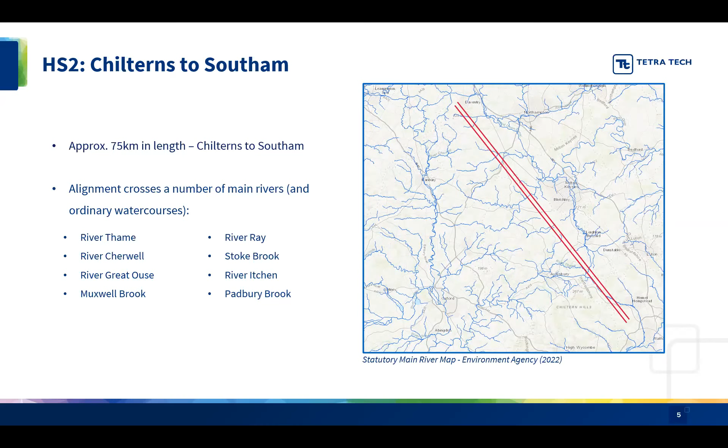So I'll just run you through now the different sorts of packages I'm involved with for consenting on High Speed 2. So probably starting off with the most simple sort of package is for drainage outfall. So this could be a drainage outfall draining from the HS2 track itself, or the embankments and the cuttings associated with the track and discharging into watercourses. Also drainage culverts conveying the same sort of drainage.

Watercourse diversions are a bit more complex. That looks at where we're having to actually divert the watercourse due to the HS2 alignment or structures associated with HS2. Flood compensation areas, we have to consent for them as well. So that provides mitigation for any increased flooding from HS2.

So section 2 is the case study of Viaduct X. So I've been leading on this consent, which comprises an 880 metre long viaduct, which crosses a main river on the HS2 alignment. As it crosses a main river and its pier footings either side of the channel are in proximity of the channel itself, it requires consent from the Environment Agency.

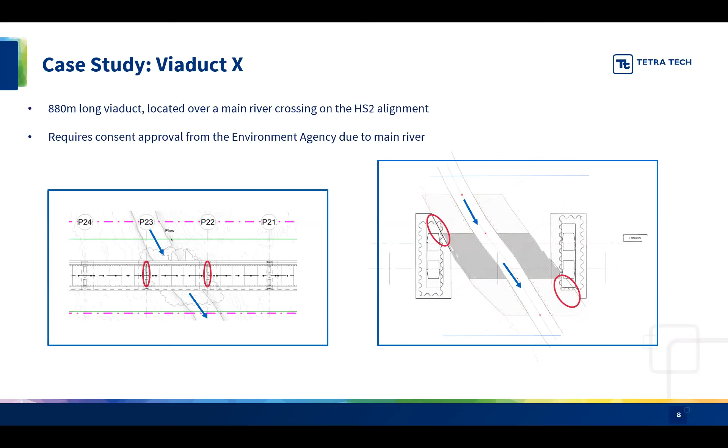And then the angular pier shape of the pier footings also may provide a greater structural benefit, but again, the EA flagged that these piers can actually be more prone to causing scour due to their shape, essentially.

So following this, I used my knowledge of the Water Framework Directive to identify that the scour potential from our current design could actually be detrimental to the WFD status of the water body and also to flood risk in the area. So I reviewed the water body status and I found that the water body was assessed as having a yellow impact as defined by the Water Framework Directive.

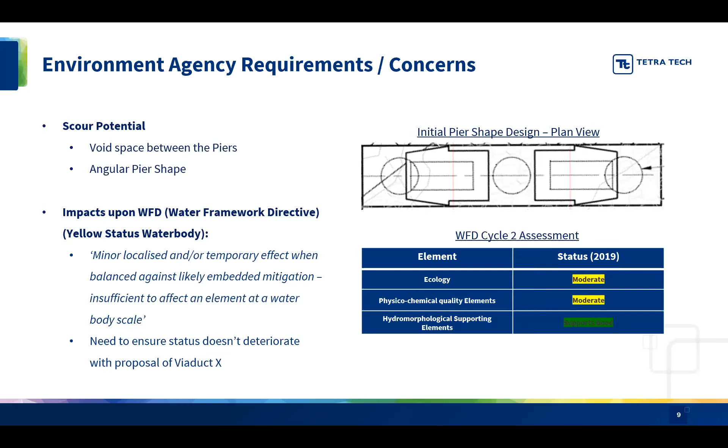And I facilitated these discussions between the design disciplines to essentially satisfy the EA requirements, but also to ensure WFD impacts were negated, and to ensure HS2 tech standards were adhered to as well.

Sorry, my slide's sticking a little bit. Oh. Sorry, it's not wanting to move on. I'll give it a second to load. I think I've frozen. Hello? Am I still in the call? I can't quite see. Oh yes, Josh, we can hear you, but we're on the communication with design teams slide at the minute. Maybe you need to stop sharing it and share it again. Oh, it's moved on now. Okay, there we go. There you go, I just saw that. Sorry, I lost where I was for a second.

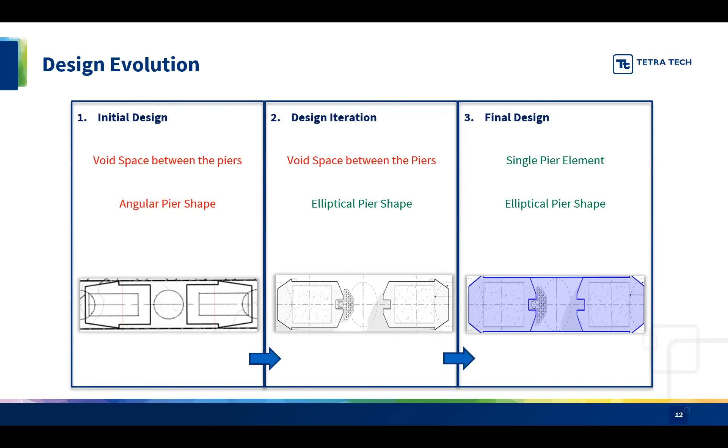Oh, I think it's struggling again, sorry. I've gone through this many times today and this hasn't happened, as it usually happens. Let me try. I'm getting a little frozen circle, sorry. Yeah, we can still hear you, Josh. We're just on the design evolution slide at the minute. Oh no, it's really struggling. I might have to stop sharing. My whole computer's not wanting to open the PowerPoint. I'll close it and reopen it. Apologies. All right, Josh, take your time, and if you're still struggling, we'll come back to yours in a minute. Okay, I think it's working now. I'll share my screen again. Can you see the slide? Resolution and challenges. Yes, that's on there now. Perfect. Sorry about that.

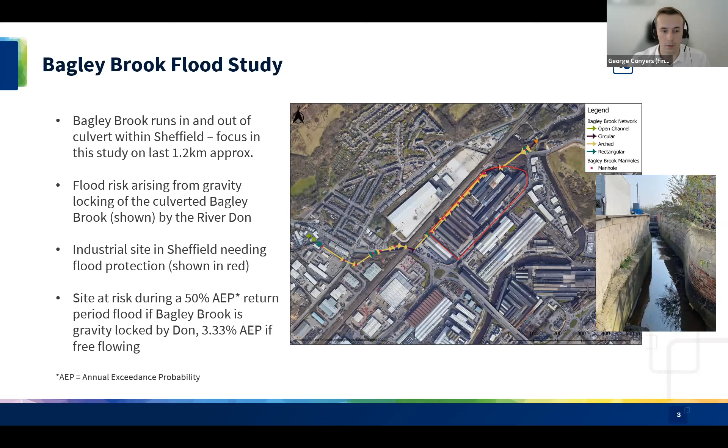So initially, I started on a hydrological assessment, which was carried out using WinFAP 5 and ReFH2. So I used a statistical method in WinFAP and did a GIS assessment of the FEH catchment, and I found that I needed to extend the catchment out to include the last portion. So I increased the size of the catchment.

I then upscaled the ReFH hydrographs that I got from ReFH2 using the derived flows from the statistical method for use in the TUFLOW hydraulic model that I built. I also applied climate change allowances to that. So at the time the allowance for the upper epoch was 40%. So that's what you'll see in some of these slides later on.

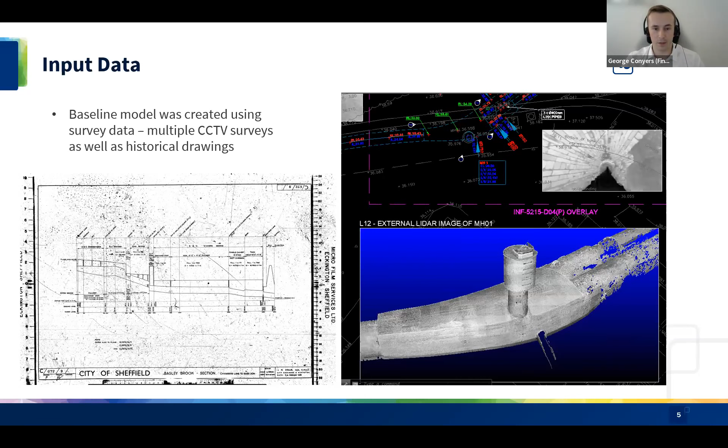So in terms of constructing the model, it was constructed in TUFLOW. I used shapefile layers created in QGIS, which has a standard naming convention. That's then run through a text file, and that's then run through the TUFLOW executable file. So the model I created was a 1D-2D linked model. So it used that survey data from the other slides for the 1D culvert network.

And then for my 2D domain, I used a 1 meter resolution EA LiDAR. And then I applied OS MasterMap to that, which I was able to use for the Manning's roughness to get a good representation of how water would flow over the floodplain.

I inserted the hydrological flows that I derived from my hydrological assessment as weighted point and lateral inflows, and that was based on the catchment area. So I think I applied a point inflow at the top of the model of 88% of my derived flow, and then the rest came in as lateral inflow.

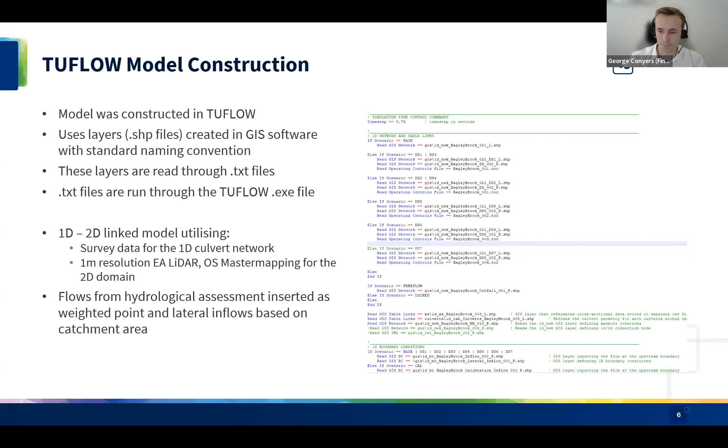In terms of the challenges that I faced when modeling this, to start with, most of that reach was culverted, so 1,150 meters of that 1.2 kilometer stretch of study area was culverted. So we really needed that 2022 data and synthesizing other bits of data that we had to get a good hydrological and hydraulic understanding of the Bagley Brook.

We had some challenges in terms of gaps in the survey data. I couldn't find inverts for all the changes in culvert dimension, which is required by TUFLOW, and I had to then manually interpolate between those points with the inverts that I had. Again, using a 1949 long profile, everything was in feet and inches, so I had to convert that and then find out where those inverts were in relation to the present day manholes.

There's also quite a lot of complex structures within that culvert. For example, one of them was a siphon chamber, which I had to model. And there's no sort of known example of how I would do this. So I had to devise a solution from my own knowledge of hydraulic modeling.

And also a further challenge that I encountered was the fact that you've got a sewer pipe running straight through the middle of the chamber. So it was even more complex to find a solution there. And this is just my model that I created.

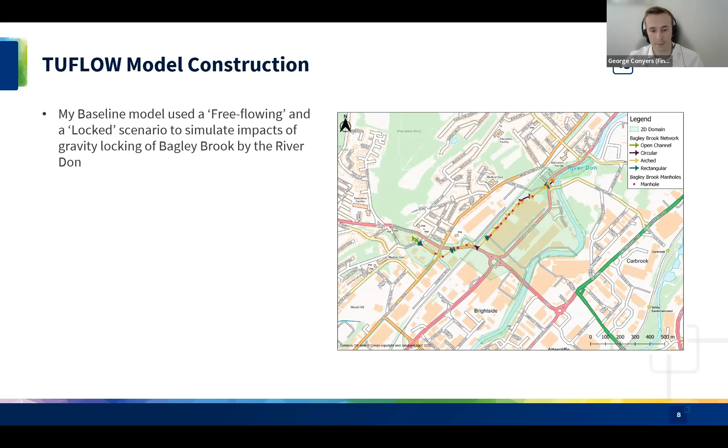So I created 2 baseline scenarios, one free flowing and one locked, to understand how the River Don impacted on the flows within Bagley Brook. So you can see that in that picture, the 1D domain with the lines is the culverted Bagley Brook, and then a 2D domain over the top to simulate flood flows from surcharging, etc.

So my baseline results, this is from my locked 1% AEP plus 40% climate change event. So this is sort of the top end of the events that I ran. In terms of the model calibration, I found that the results and mechanisms were consistent with a report I received from the client. So I'll play this for you now.

So you've got surcharging from the far right, moving from right to left as the culvert fills up from the Don end on the east side to the west side at the inlet. So it starts to back up, surcharging from a siphon chamber on that far right one, back of the site in sort of the middle there, and then Upwell Street is that last left red circle, and then overtopping of an inlet at Chambers Lane is that purple circle.

So I'll play that one more time and you get an idea of that culvert filling up from right to left and surcharging through and overtopping the inlet at the far end. And that was my baseline that I compare against for my option runs, which I'll talk about soon.

So the cause of the flooding was, again, gravity locking of the Bagley Brook. I sort of knew that from what I'd heard from the client. And that was also confirmed by the EA model of the River Don that I ran in Flood Modeller. So I knew that was happening.

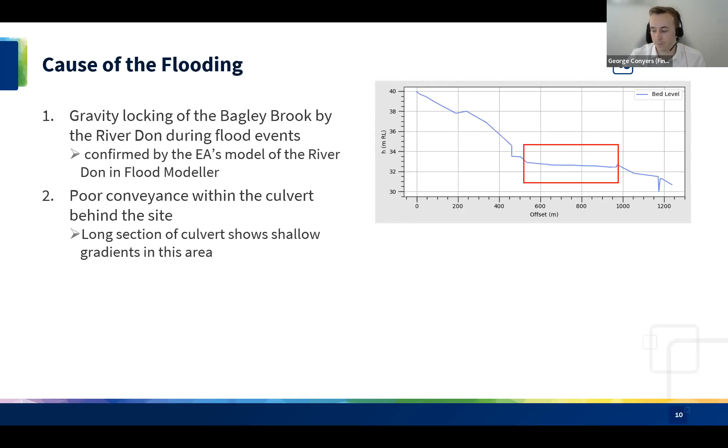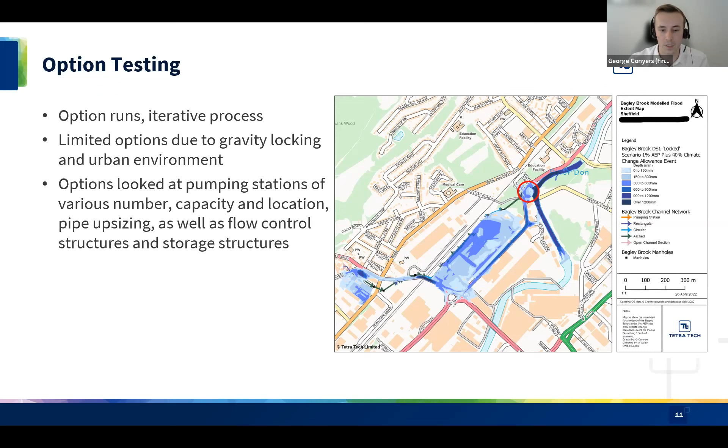So the options I looked at were pumping stations of various number, capacities. I sort of changed the capacities to see how that would impact on the culvert and the flows in this event. Also their location. I looked at pipe upsizing, looking at pinch points within the network, to try and find a solution with that. And I also tried to use flow control structures and storage structures to find a solution, which was this.

So this solution was submitted to planning. It's a pumping station offsite, and you see that in the right image, and that's a 6 cumec pump, which provides flows during a locked scenario of the Bagley Brook. And additionally, developed a diversion channel to an underground storage tank, which has got a volume of 5,600 cubic meters.

There's a 300 mil raised culvert entrance, so that stops low flows getting into the tank. So you wouldn't have to pump out the low flows. Those are all just sent downstream. So it's only in the event of a flood where that would be utilised.

Also a sluice gate to limit the flows downstream. So the surcharging that was caused at the back of the site was prevented by this, as it was only letting a certain amount of water down during these flood flows. And also a floodgate on the west side of the site to protect from flows from Upwell Street. So those are coming sort of from the west to the east, down Upwell Street and up to the northeast.

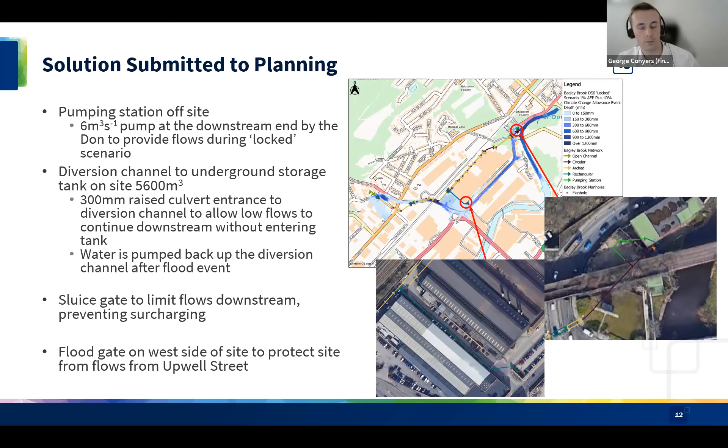In terms of the benefits this gave the area, there was a reduction in flood risk to the site in the 1% AEP and 40% climate change scenario. There's no flooding on site. Reduced flood risk to the businesses to the southwest of the site. So you can see that in the lighter greens and the dark greens in there. That's provided a decrease to the flood depths. That then causes a reduction in traffic disruptions, so a bit of social benefits, and also council cleanup costs are less because there's less water in the road network.

Also, it was environmentally sound, so it was WFD compliant. The pumps that we will use will be fish compatible, so not harm them. And biodiversity net gain on the wider project. So this is part of a sort of wider project where we're aiming to get 10% biodiversity net gain.

The impact on the Don as well was something we had to consider. So I used a modified version of the Don model that I was given from the EA, and that I modified by applying a pumped flow from our pumping station that I'd created, and I found that there were no issues as a result of that. So that's the end of my presentation. Any questions?

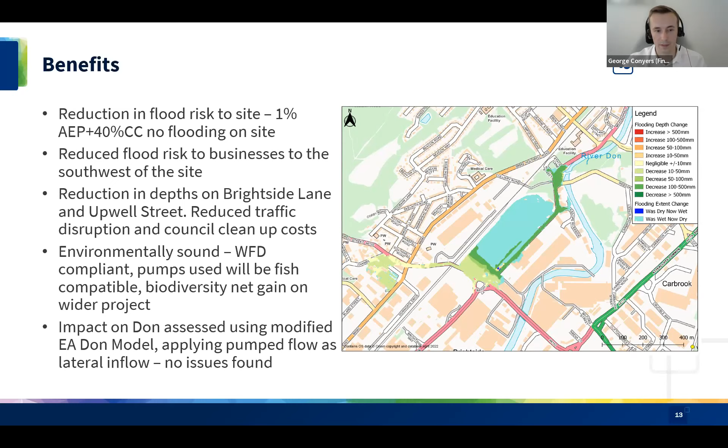Okay, thanks very much, George. So I think we figured out that the people who are panelists and the judges are unable to add questions into the Q&A, but the audience members can.

So there is a question on there from Simon Lewis. Was there any known interaction with the sewer network, and was this considered as part of the flooding assessment? There was no known sewer interaction that I was aware of. We didn't have the data for the wider surface water network, so unfortunately we weren't able to apply further inflows from the surface water network. But in terms of interaction with sewer, no, there was no interaction with that. Okay, thanks.

There's no other questions in the Q&A chat, so I'll go back again to the judges. Looks like Rob might be coming on with a question. Yeah, I've got one. Given the watercourse is so culverted, what was the reason for choosing TUFLOW, which is predominantly the 2D modelling package for overland flow? And I guess how did you model the culvert in TUFLOW? Did you use ESTRY or was it Flood Modeller Pro? I'm just interested in some of the more techie details about how your thought process evolved, how you chose TUFLOW, and whether you thought it was appropriate.

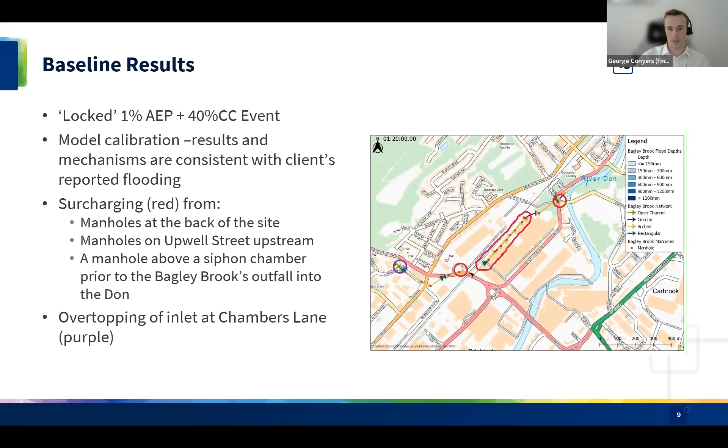So I ended up having, I'll go back on here, so I ended up having 2 channels created. So I have a channel going above this sewer pipe and a channel going below the pipe. And I had to sort of calculate my own invert levels for that, and come up with that solution. So that was quite difficult as well, in terms of building up the network that way.

Okay. My next question is, how did you validate it? How did you calibrate it? And things like that. This particular model, presumably there's not much information, but given what you just said, there could be some issues there potentially.

Yeah, in terms of the calibration, as I said in the slides, I used a report that I received from the client in terms of when flooding occurred during an event, and matched it up to the simulated baseline. I also had an EA gauge at the top of the network. So I used that as well in the calibration, to make sure that my model was working correctly. Yeah, okay, interesting. That's really interesting.

Thanks, Rob. Anna, I see you've come on camera there. Did you have a question you wanted to ask? Yeah, I've got a question. It's a lot less techy than Rob's.

As I'm not a modeler, but I was just interested in, obviously you said that you put in a pumping station and that was your kind of solution to the problem. I was just wondering about the optioneering process that went into that and whether you considered any other options. Just interested in how you arrived at that as the most appropriate solution.

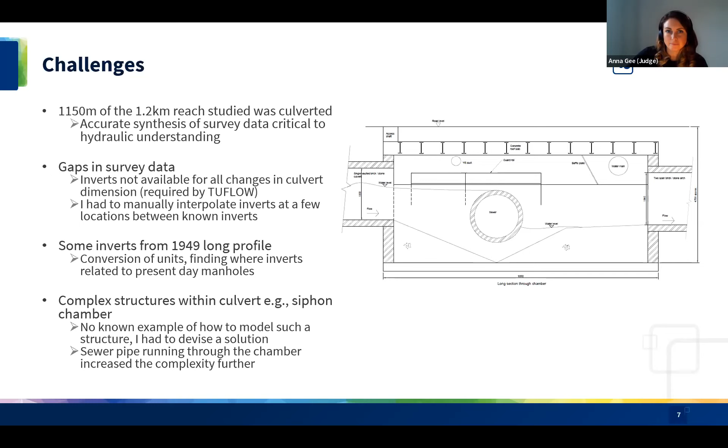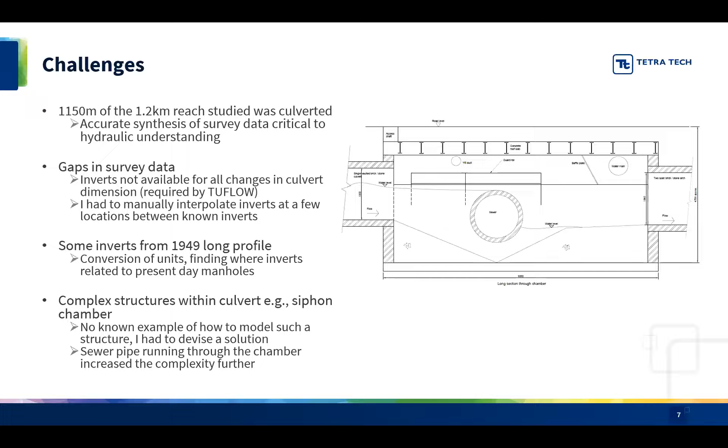Okay, thanks very much, George. I think we'll move on to Josh's presentation now. So if you want to stop sharing, George, and we'll let Josh take over. Yeah, thank you. Just quickly put my camera back on. Is my audio all right? Can everyone hear me all right? Yes. Okay, great. Let me just share my screen. I've just loaded that up there. Has that come through? Yes, that's coming through, and we can hear you. Over to you then, Josh. Thank you. Okay, great.

So, hi everyone. The title of my project is Exploring the Catchment-Wide Implication of Flood Mitigation Optioneering. So just a brief overview of myself. My name is Josh Greener. I'm a wastewater modeler working for RPS Group, and I started in the industry in September 2019. So I'm just coming up to about 3 years in the role, and I'm also a graduate member of CIWEM.

So just a quick breakdown of the key topics I'm going to discuss. I've got 4 main sections: introducing the project, some immediate optioneering considerations, some detailed wider considerations which I've broken down into flooding, surcharge, and CSO spill, and then a section on some personal lessons learned along the way. I haven't got a specific section on key challenges, but I'm going to be discussing them as they come because they're quite relevant to the sections.

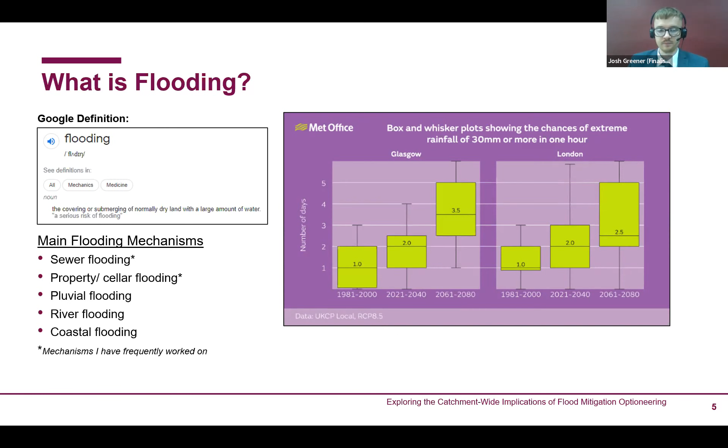I also just want to mention SuDS as well, so sustainable urban drainage systems, and they take many forms, aiming to utilize green infrastructure to provide storage and slow runoff to ease pressure on the network during intense storm events. I think SuDS are becoming increasingly integrated into the flood schemes, but there seems to be a difficulty that lies with the fact that they aren't as well established as tested options. And I know water companies want solutions that have proven results, which somewhat deters their usage. But hopefully, as they become more trialed and more tested, that'll change in the future.

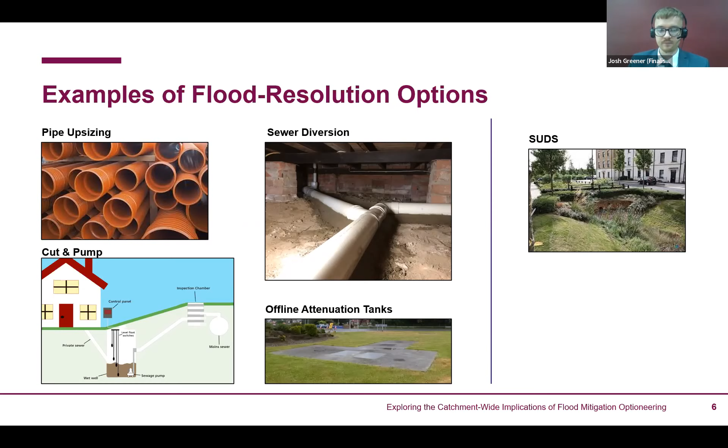So this can be done by looking at flow survey coverage, manhole surveys, and also EDM and telemetry data at key ancillaries. So from there, you can identify the root cause of your flooding for each specific incident. So what's your main cause of your flooding, what's your main mechanism?

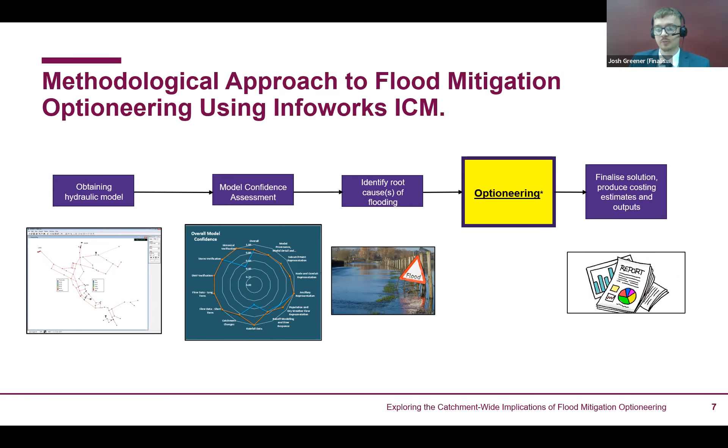And then next is your optioneering stage, which I'm not going to go through in too much detail at this stage because the bulk of my next slides cover this, but essentially it's your extensive model testing and selecting the most suitable option. Once you've selected and tested your option, you can liaise with multidisciplinary teams, i.e. you can get some civils inputs, you can work with surveyors, and you can essentially produce your final outputs, which can include costing estimates and final reports, and then obviously getting your option in the ground if it's successful.

So moving on to section 2, optioneering immediate considerations. So when you're selecting the most appropriate mitigation option from a non-hydraulic background, it might seem logical to look at the option that's the most cost effective, maybe the cheapest option, or the one that's the most constructible and easy to install. If you have a basic understanding of the sewer system, you might think looking at your root cause of flooding, you can work out what seems like the most logical response to your flood risk.

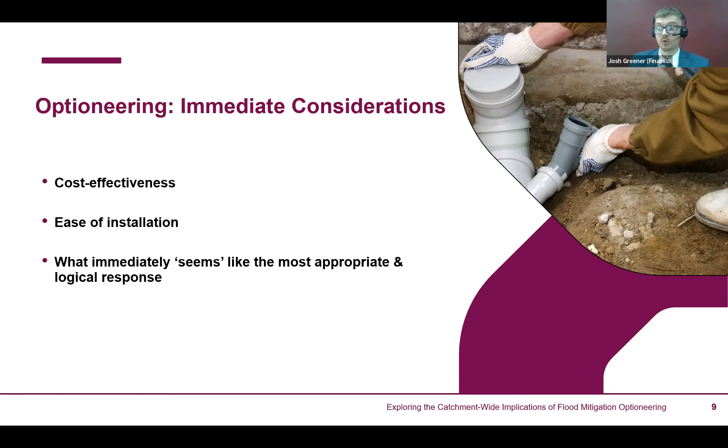So for example, if you had a 500mm pipe that downsized to a 225 pipe and that throttles flow causing your flooding issue, you might just think, okay, can we upsize that sewer? Can that be our main solution? And here's why it is important to not just do that and to also consider the wider catchment. So the wider considerations, I'm going to split into flooding, surcharge and CSO spill. As I mentioned at the start, this is a process. So for each branch, I've identified key risks and also how I assess these.

So starting off with flooding, one key consideration is you've got to be wary when you're looking at options which alter the rate of pass forward flow. So I'm talking about options such as upsizing pipes and diversions, because this can increase or decrease the rate of flow in a particular section of the network. Now that's got the potential to worsen or offset new flooding at low spots in the nearby catchment. So generally the golden rule is your solution cannot worsen performance elsewhere, otherwise it's not successful.

So the question is, how would I assess that? So generally I'd run FEH13 design rainfall through a baseline and an option scenario in my network model. And from there I can assess changes in maximum flood volume using something called a level of service assessment. Now all this is, in simple terms, is a spreadsheet which you put together and you use formulas and lookups. And when you've exported your model results, your level of service sheet will flag up manholes which experience a sizable increase in maximum flood volume or top water level, or any flooding that was not present in the baseline, so any new flooding.

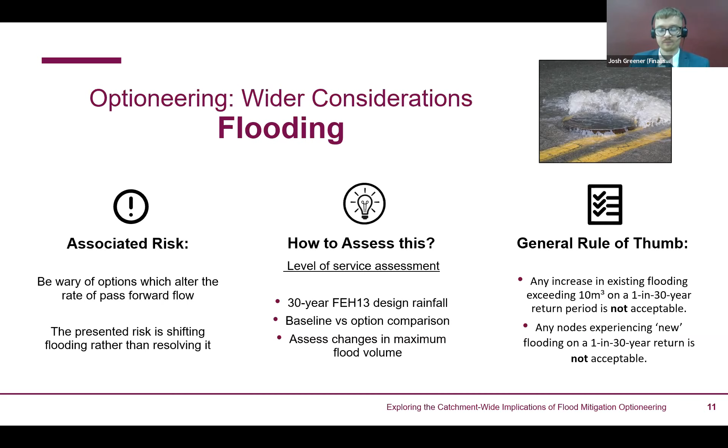So generally the acceptance criteria is up there, and I think this emphasizes the importance of producing a zero detriment solution. So any new flooding or any significant rises in existing flooding are not acceptable. So just to look at an example here, I've essentially got a long section from InfoWorks ICM, which shows generally your sewer level, your top water level, and your ground level.

So in this example, you can see that in the upstream section, so I'll just point with my mouse, you've got a few of those manholes upstream, 4 of them experience flooding. And that's because you've got a 500 pipe downsizing to a 225, which I used as my example before. Now I use that for a specific reason.

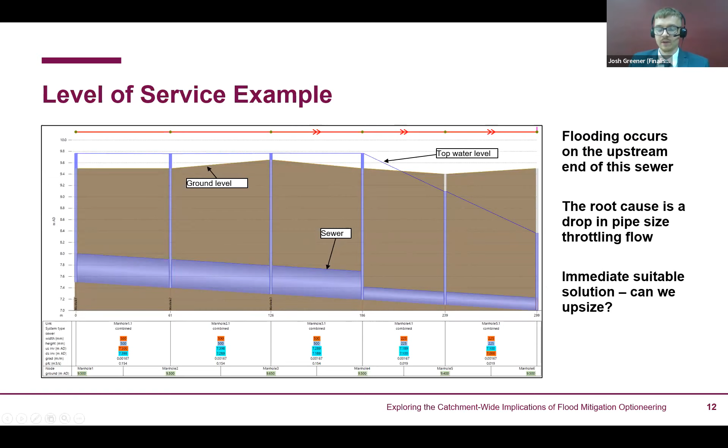When you look at the solution, which I'm now showing, it seems that when you upsize that 225 to a 500 pipe, although your top water level upstream is still high, you generally look to have solved your flooding. You're not getting any flooding anymore. So would you then think, okay, that's your job done, you can move on? No, you can't. You've got to look at your level of service assessment, which I mentioned is so important.

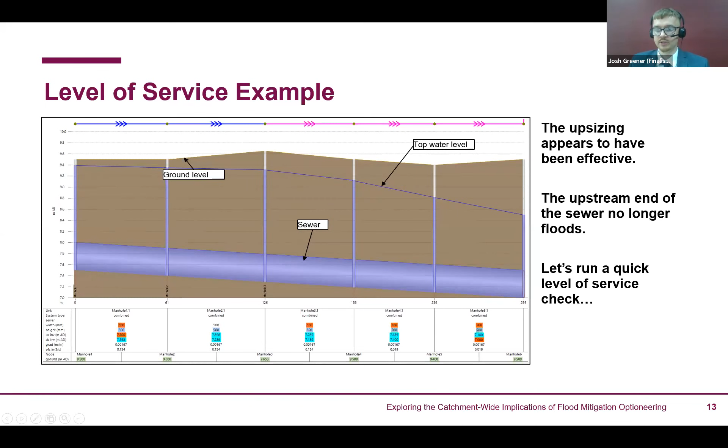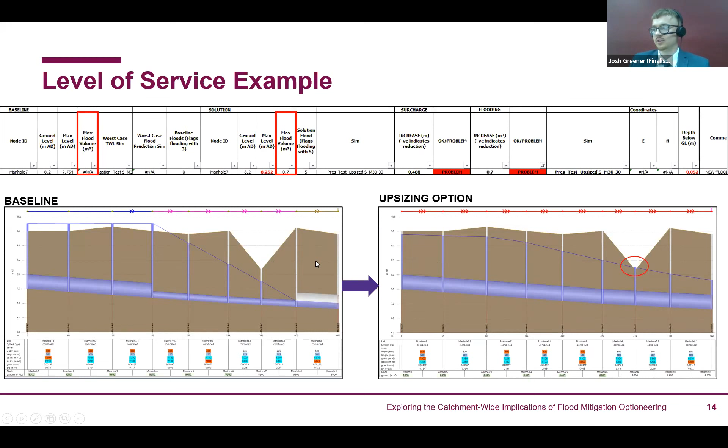Just on your second wider consideration, you've got surcharge. So it's always crucial to check for cellar connections in the vicinity of your flooding location. Even a relatively small increase in top water level around any cellars might result in foul flows backing up into a customer's property. So back to that golden rule, your solution cannot cause problems elsewhere. And how do we do this? Your level of service checks will pick that up as well, because they'll pick up top water levels as well as flooding.

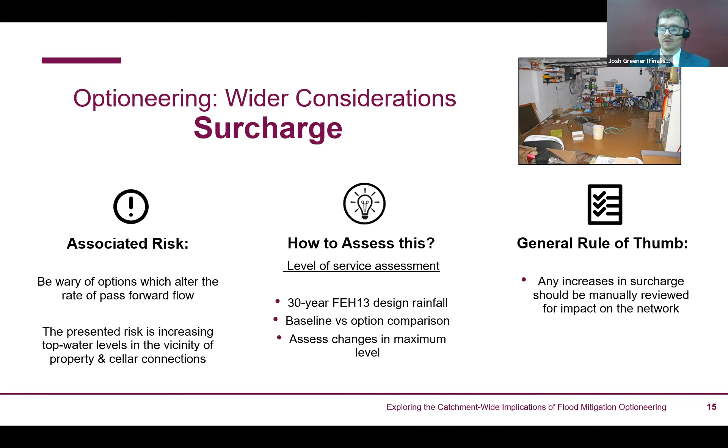On to my third and final consideration is the impact on nearby overflows. So again, when you're talking about options which alter the rate of flow, you might increase your pass forward flow, which that example did. And if you've got any sort of overflows downstream, you might see an increase in spill frequency or spill volume. Now, again, generally any increase in spill frequency is not acceptable.

And there's currently a big push towards improving river and bathing water health. And the Environment Agency have regulation on spill frequency from overflows, which I think just emphasizes how important it is to push for a more environmentally sustainable solution.

So how do we assess that? I use historical rainfall, and I will generally run a time series through your baseline and your option scenarios. Then set up a statistics template in ICM, which counts the frequency of overflow spills across that given year and the volume of spilled flow. I think the key challenge with this is your time series rainfall generally takes quite a while to run through your model, especially if you've got a big model. So depending on the size, you've just got to be wary of time management. You've got to make sure you've got enough time to get those run.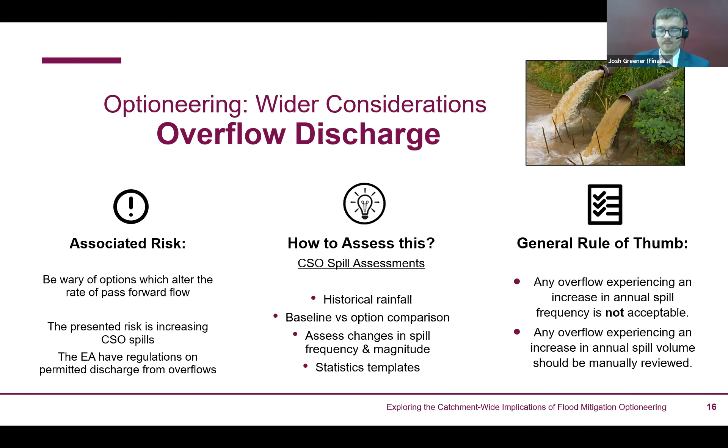And long story short, in terms of the outcome with that, we did a bit of extensive model research on it. There was a bit of instability in the model. So what we then did was we worked out it probably wasn't going to be that case in terms of volume. And from there, it was generally accepted through the instability and the fact it was a relatively small increase. So that proposal is now accepted and the work for the development is currently under construction.

So just onto my last section, lessons learned. So number one, as I mentioned, model confidence is critical. If you're going to be putting a solution in place and you're going to be testing it, you want to make sure your model is actually replicating reality. Otherwise, your solution's not going to work, especially with storage tanks, because it can go either way. You're either going to sell yourself short and not provide enough storage, or you're going to waste money by providing storage that's not needed.

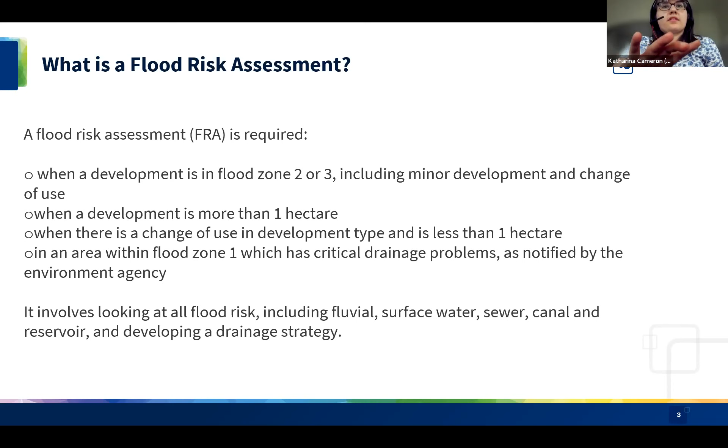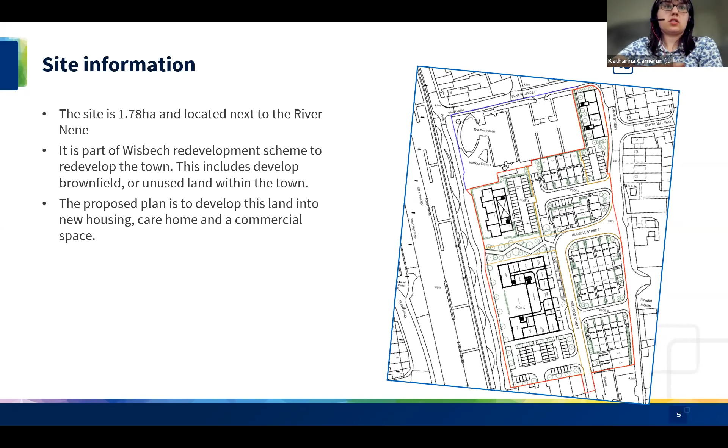Due to the flood risk of the site and the proposed development being classified as vulnerable by the government, the site needs to pass the sequential and exception test, which means it needs to be demonstrated that the flood risk to people and property will be managed, ensuring the safety, development, and sustainability of the site.

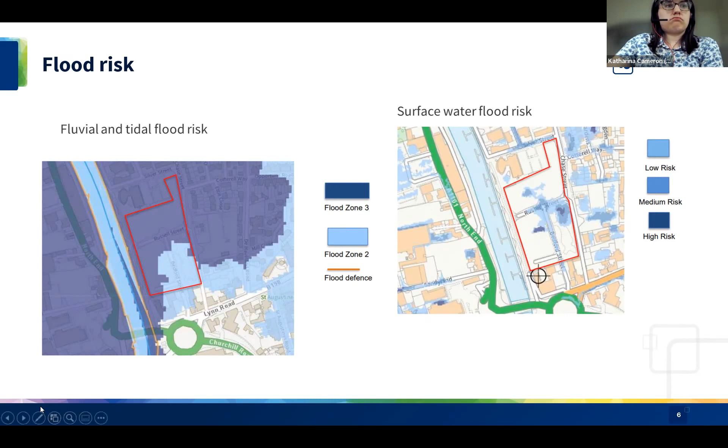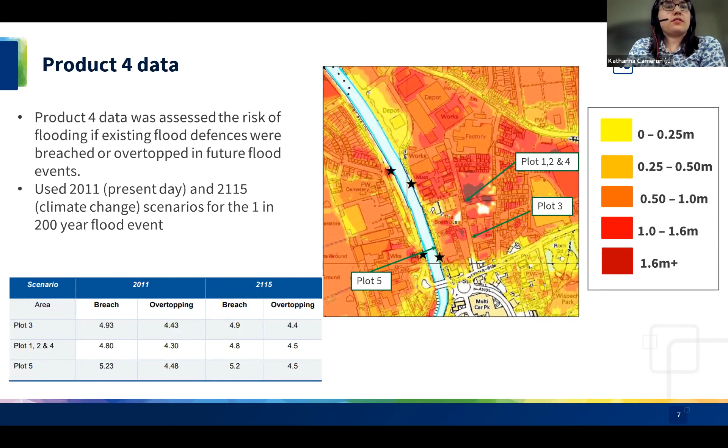So in order to pass the sequential test, I looked at the local plan and the strategic flood risk assessment and local surface water documents. It passed the sequential test because it's allocated in the local plan as a key part of the regeneration of the town. In order to pass the exception test, I need to prove that flood risk to people and property would be managed, with wider sustainability benefits to the community, and safe for its lifetime without increasing flood risk elsewhere. This was done by making sure the finished floor levels are set above the flood depth and including other safety measures such as safe refuge and a means of escape. Because of the different types of development on this site, different safety measures are needed.

So any sort of housing, residential houses would need to find a place of safety above the breach level, and there could be no sleeping accommodation on the ground floor. Any sort of apartments' ground floor finished floor levels need to be 5.3 meters or above, 600 millimeters above the breach level.

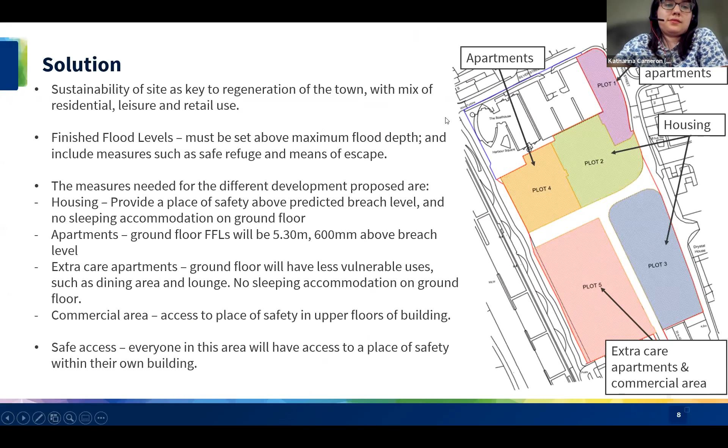Anna, did you have a question as well there? We're just interested to know what level of engagement you had. Obviously, you've done all the hydraulic modelling, but what level of engagement did you have with the statutory authorities before this was submitted? Yeah, so there are the council documents. I didn't necessarily contact the statutory bodies, but I read all the relevant documents to see what their standard practice was. Okay.

I think I have a similar question. So obviously you came up with a series of recommendations as part of the flood risk assessment. I'm wondering how you worked with the client and the Environment Agency to make sure there was still a sound commercial development there for your client, and whether there was a lot of give and take with the parties to arrive at a successful risk assessment.